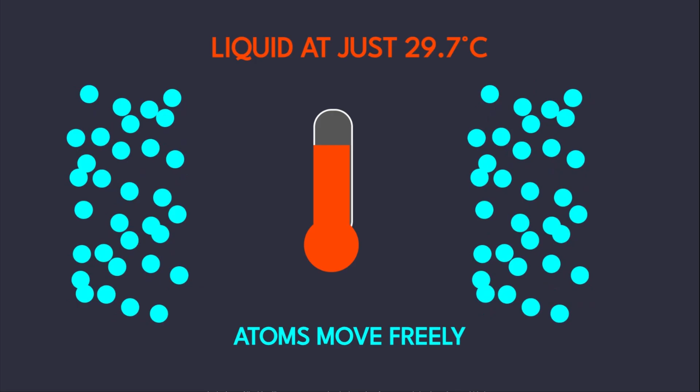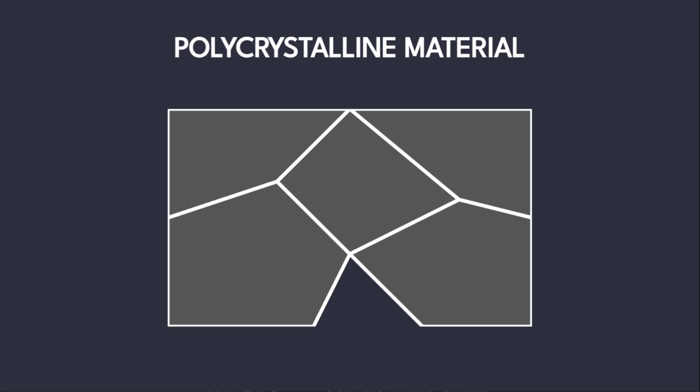When this liquid touches aluminum, it does not simply sit on the surface like water. It initiates a process of rapid diffusion that targets the weakest points of the metal's internal architecture. This interaction is not a standard chemical reaction that creates a new compound throughout the bulk, but rather a surgical strike on the bonds holding the crystalline grains together. Understanding this requires looking past the shiny metallic surface and into the thermodynamic forces that drive liquid gallium into solid aluminum.

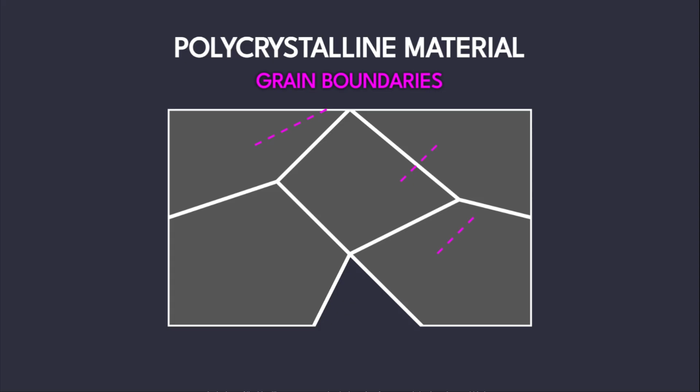Aluminum exists as a polycrystalline material, meaning it consists of millions of tiny crystals or grains. These grains are oriented in various directions, meeting at regions called grain boundaries. In a pure aluminum structure, these boundaries are held together by strong metallic bonds. However, gallium atoms possess an atomic radius and electronegativity that allow them to slip into these boundaries with minimal energy cost. As gallium atoms penetrate the lattice, they disrupt the cohesive energy between aluminum atoms.

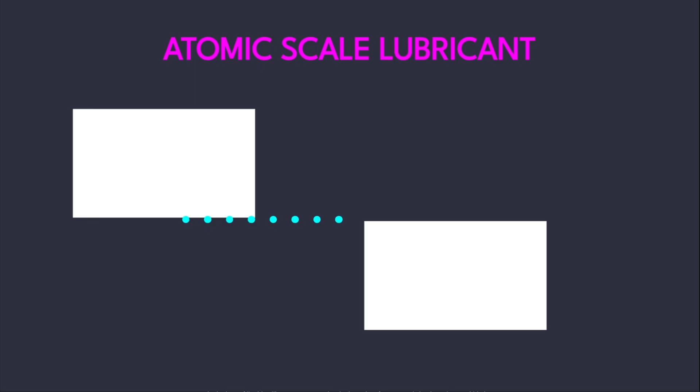Because gallium has a significantly lower melting point and different valence electron configuration, it cannot maintain the structural rigidity required for the aluminum to remain a solid. The gallium atoms effectively act as a lubricant at the atomic scale, replacing strong aluminum-to-aluminum bonds with much weaker interactions. This specific type of intrusion transforms a ductile metal into a brittle substance that can be crushed by hand.

The phenomenon occurring here is scientifically classified as liquid metal embrittlement. This is a specific form of environmental degradation where a normally ductile metal loses its plasticity and tensile strength when exposed to certain liquid metals. For aluminum, gallium is the ultimate embrittler because of its high solubility at grain boundaries and its low surface tension.

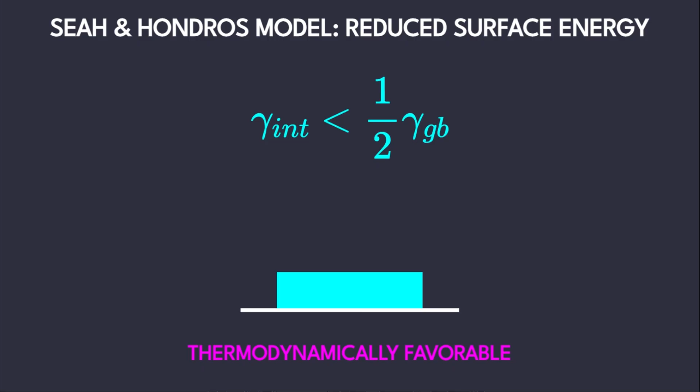The liquid gallium reduces the surface energy of the aluminum grain boundaries, a process described by the Seah and Hondros model of grain boundary enrichment. This reduction in energy makes it thermodynamically favorable for the gallium to spread throughout the internal network of the metal. Unlike corrosion, which involves the loss of material through oxidation or chemical consumption, liquid metal embrittlement is a physical transformation of the bond characteristics. The aluminum remains chemically present, but its macroscopic structural properties are completely neutralized by the presence of the foreign atoms.

Aluminum is naturally protected by a transparent, highly stable layer of aluminum oxide, also known as alumina. This ceramic layer is what prevents aluminum from reacting instantly with oxygen and water in the atmosphere. To destroy the aluminum, gallium must first bypass this protective skin. If the oxide layer is perfectly intact, gallium may sit harmlessly on the surface. However, any microscopic scratch, thermal stress, or mechanical deformation provides an entry point.

Once the gallium makes contact with the raw aluminum metal beneath the oxide, it begins to spread laterally. It moves underneath the alumina layer, lifting it away from the metal substrate and preventing the aluminum from reforming its protective barrier. This creates a self-sustaining cycle of penetration. As the gallium moves deeper into the structure, it opens new paths for more liquid to follow, effectively tunneling through the material from the inside out.

The speed at which gallium destroys aluminum is driven by the physics of grain boundary wetting. In metallurgical terms, a liquid is said to wet a boundary if the energy of the liquid-solid interface is less than half the energy of the original grain boundary. Gallium exhibits an exceptionally low dihedral angle when in contact with aluminum grain boundaries, often approaching 0 degrees.

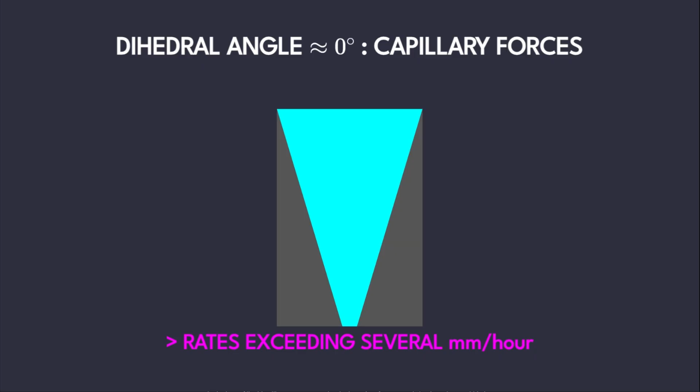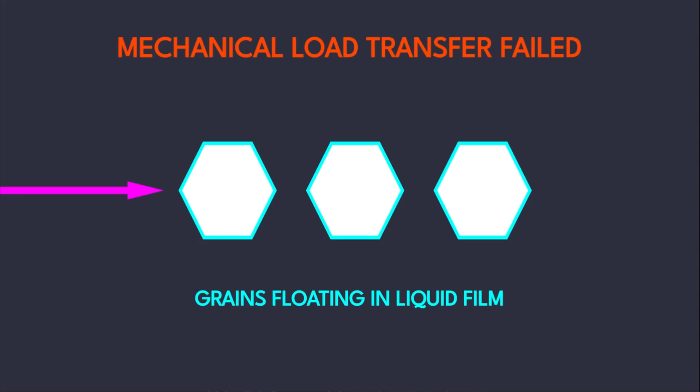This means the liquid gallium is pulled into the metal by capillary forces, much like water being absorbed by a sponge. This movement occurs at speeds far exceeding standard bulk diffusion. In some aluminum alloys, gallium can migrate through the material at rates of several millimeters per hour. As the gallium film coats each individual grain, the macroscopic object loses its ability to transfer mechanical load. The grains are no longer bonded to each other; they are merely floating in a thin film of liquid gallium.

Temperature plays a dual role in the destruction of aluminum by gallium. First, the gallium must be in a liquid state, which occurs at approximately 30 degrees Celsius or 86 degrees Fahrenheit. If the environment is colder, the gallium remains a solid and the embrittlement process is significantly slowed, though not entirely stopped due to solid-state diffusion.

Second, as the temperature increases, the kinetic energy of the atoms rises, accelerating the rate at which gallium atoms migrate through the grain boundaries. This relationship follows the Arrhenius equation, where the rate of diffusion increases exponentially with temperature.

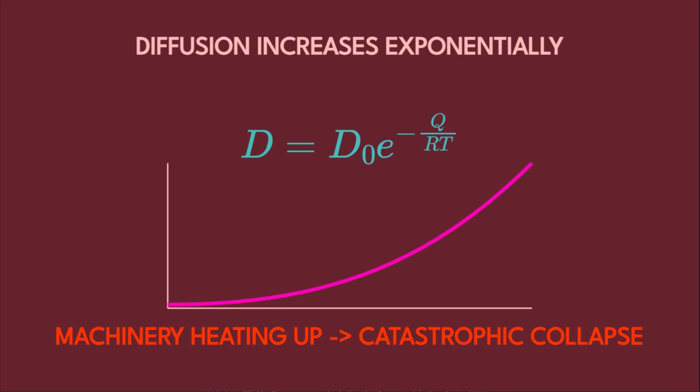In industrial environments or high-friction zones where aluminum components operate at elevated temperatures, the presence of gallium is even more catastrophic. Even a trace amount of gallium that might be stable in a cool climate can suddenly become a liquid and cause a structural collapse if the machinery heats up during operation.

Not all aluminum is created equal when it comes to gallium sensitivity. High-strength aerospace alloys, such as those in the 7000 series containing zinc and magnesium, are particularly vulnerable. These alloys often have complex grain boundary chemistries designed to inhibit dislocation movement, which provides their strength. Gallium exploits these specific microstructures more aggressively than it does with pure aluminum.

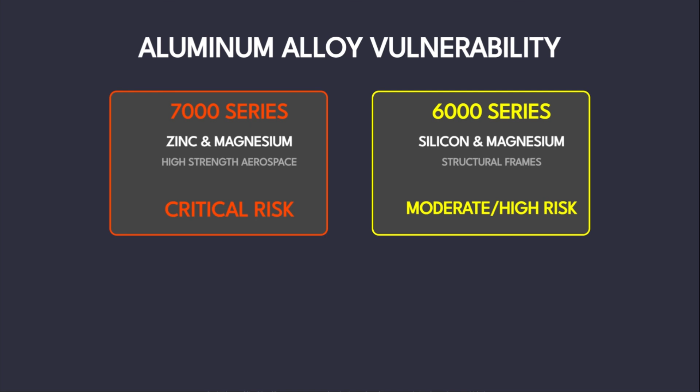In contrast, the 6000 series alloys, commonly used in structural frames and containing silicon and magnesium, show slightly different rates of penetration, but are still ultimately susceptible to failure. The presence of alloying elements can sometimes create intermetallic compounds that gallium preferentially attacks. This makes the use of gallium near any engineered aluminum component extremely dangerous, as the specific heat treatments used to harden the metal often create the very grain boundary conditions that gallium is most efficient at infiltrating.

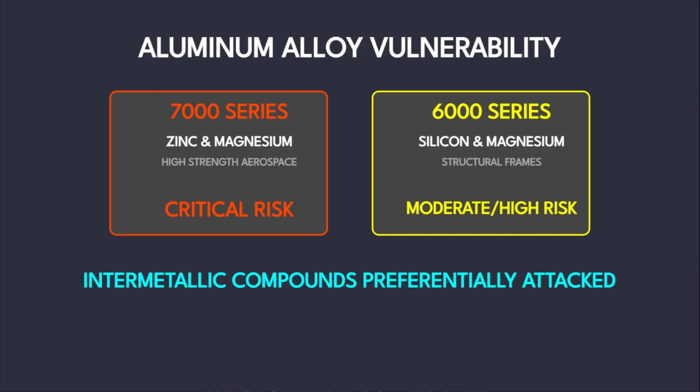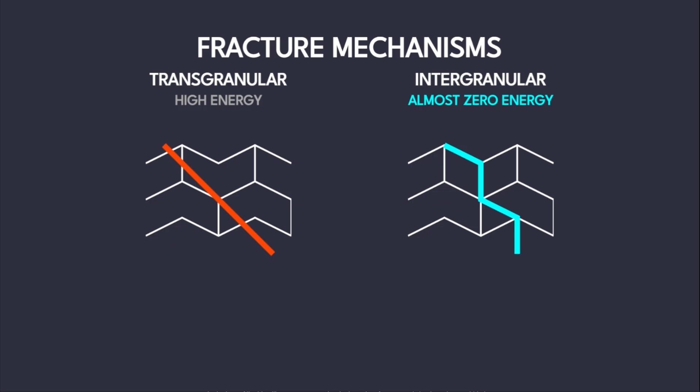When an aluminum component treated with gallium is subjected to stress, it fails through intergranular fracture. In a healthy piece of aluminum, a crack would typically propagate through the grains, a process known as transgranular fracture, which requires a massive amount of energy to break the atomic bonds of the crystal. In a gallium-infested sample, the crack follows the path of least resistance along the liquid-filmed grain boundaries. This requires almost zero energy compared to the original state.

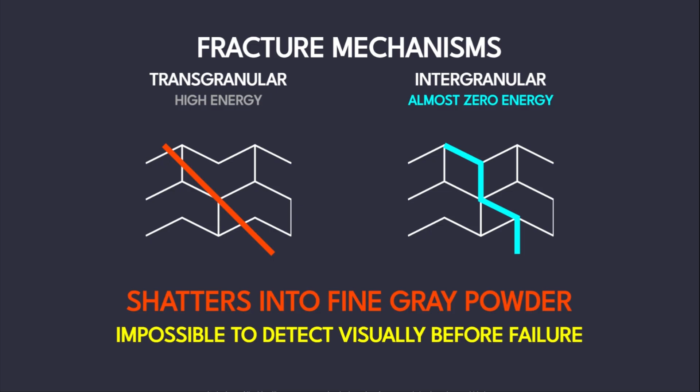The metal does not bend or deform before breaking. It simply shatters or crumbles into a fine gray powder consisting of individual aluminum grains. This lack of ductility is the hallmark of liquid metal embrittlement. Because there is no visible deformation prior to the final collapse, it is impossible to detect the impending failure through visual inspection until the structure is already compromised beyond repair.

The interaction between gallium and aluminum is a major security concern in the aviation industry. Modern commercial aircraft are constructed primarily from high-grade aluminum alloys due to their weight and durability. If gallium were introduced to the structural airframe, such as the wing spars or fuselage skin, it could lead to a catastrophic mid-air failure. For this reason, gallium is strictly regulated by international air transport authorities and is often classified

as a hazardous material. Small spills of gallium in the cargo hold of an airplane have historically required the removal and replacement of entire sections of the aircraft floor and support beams. The risk is not just from intentional sabotage, but also from improperly packaged scientific equipment or mercury-free thermometers. Once the gallium starts to spread, the only solution is to physically cut out the contaminated metal, as the diffusion cannot be easily reversed or neutralized.

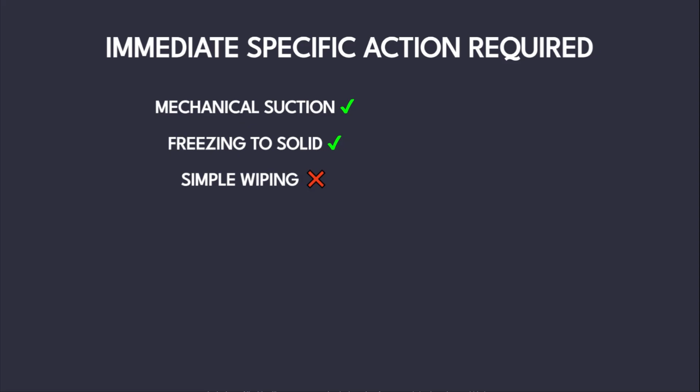Dealing with a gallium spill on aluminum requires immediate and specific action. Because the diffusion process begins the moment contact is made, the liquid gallium must be removed as quickly as possible. Mechanical suction or freezing the gallium to return it to a solid state can slow the damage. However, because the gallium moves beneath the surface oxide layer, simple wiping is often insufficient. In laboratory settings, specialized chelating agents or chemical washes may be used to bind with the gallium atoms, but these are often ineffective once intergranular penetration has reached a significant depth.

Prevention is the only reliable strategy. Professionals working with gallium must use secondary containment systems and ensure that no aluminum tools or surfaces are present in the work area. The permanent nature of the structural damage means that any aluminum parts touched by gallium are generally considered scrap and must be recycled through smelting to remove the impurity.